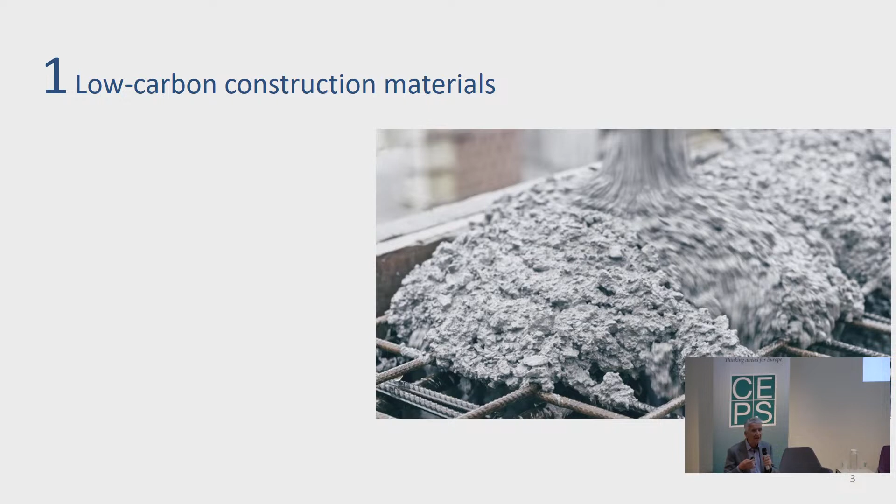Just in a nutshell, how did we start and how are we proceeding? Of course, we started out with issues related to low carbon construction materials, and this is still something we are very much interested in. I want to mention that Austria is really leading already in low carbon cement, at least compared with all the other member states in the European Union. But pretty soon, what's going on?

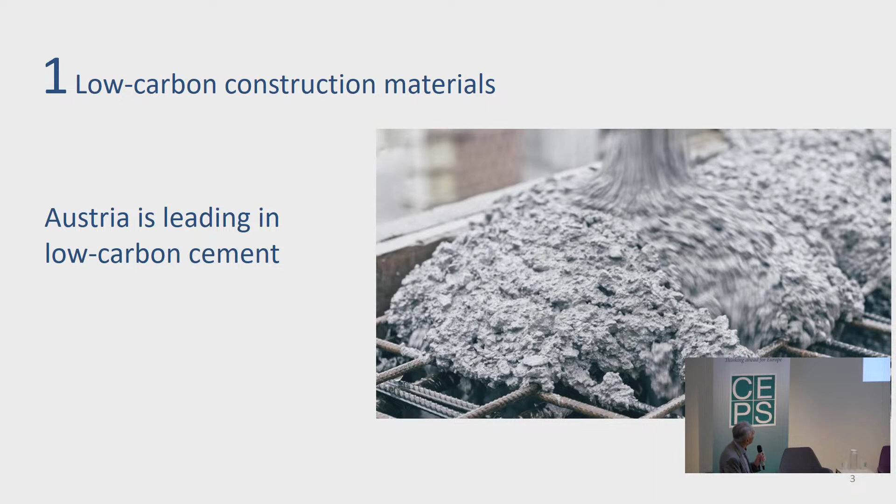Pretty soon we realized that we need to look at the full value chain in the use of building materials, and we definitely switched to what we call a systemic approach to the use of materials in general and construction materials in particular. To give an example, this is the design of a staircase, which was very much inspired by the structure of a spine. We'll definitely hear more about these design principles in a few minutes.

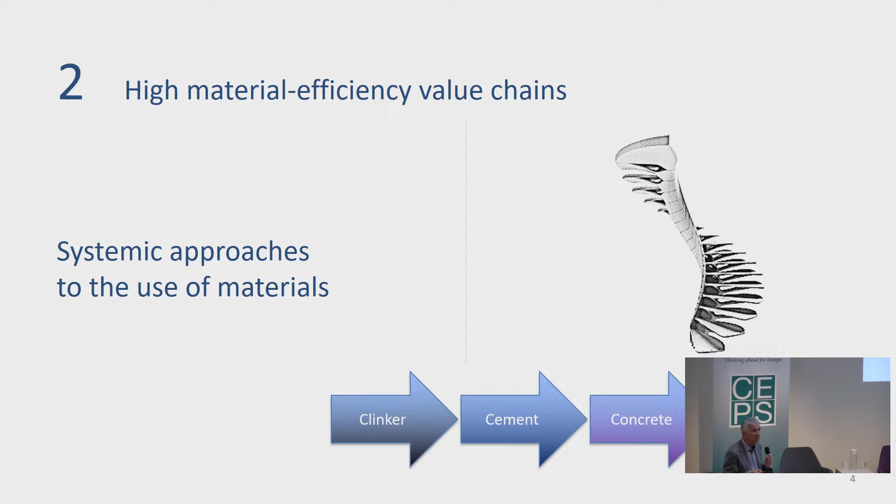Something is, wait a minute.

Okay, and I think the third step was that we discovered that buildings can have a very active functionality, as we want to call it, in localized energy systems. This is also something which will be presented in more detail later, where we discover that buildings have an outstanding capability of serving and providing thermal services.

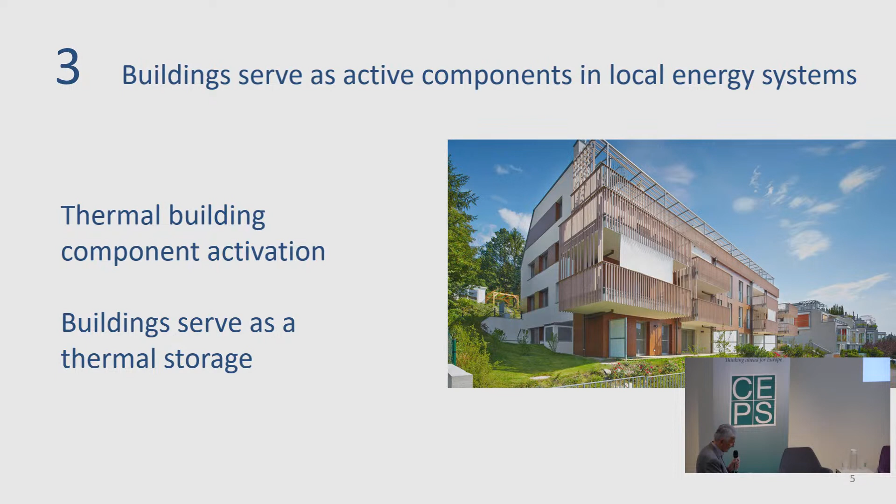And the next step was that we discovered that we really should look at what we call ensembles of buildings, not just single buildings, but how buildings interact and could interact. And we really learned a lot about this in Switzerland.

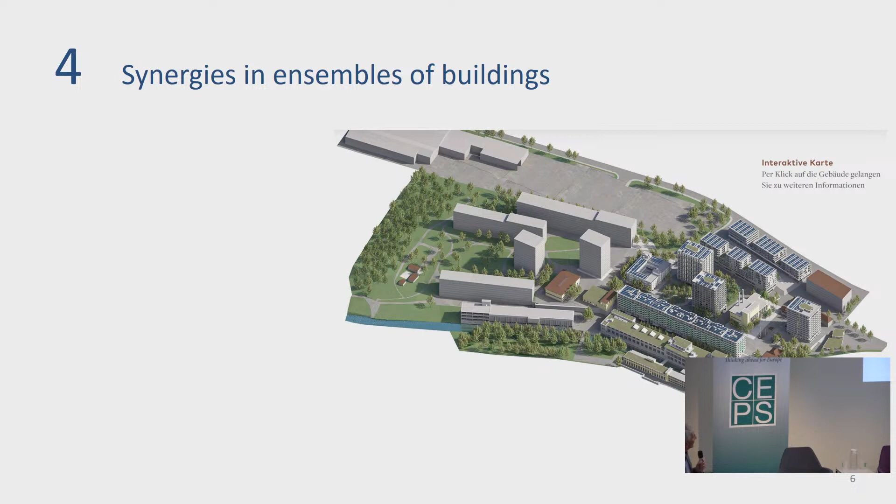In Switzerland, there are now some outstanding new developments called Quartiere - urban development projects. For example, this one is the so-called Papieri Quartier. This was a paper factory which was operated for more than 300 years.

And this is being converted now into a very innovative urban development project. Related to this innovative architecture, what we call integrated functionalities for living, working, and other activities, these projects are outstanding in their energy concepts.

And the keyword is so-called energy hubs, because they demonstrate that on a very localized scope, you can provide all thermal energy services for heating and cooling locally. This is done mainly by the so-called anergy grid. Anergy grids are also something which needs much more attention - these are low temperature thermal grids connected to local geothermal components.

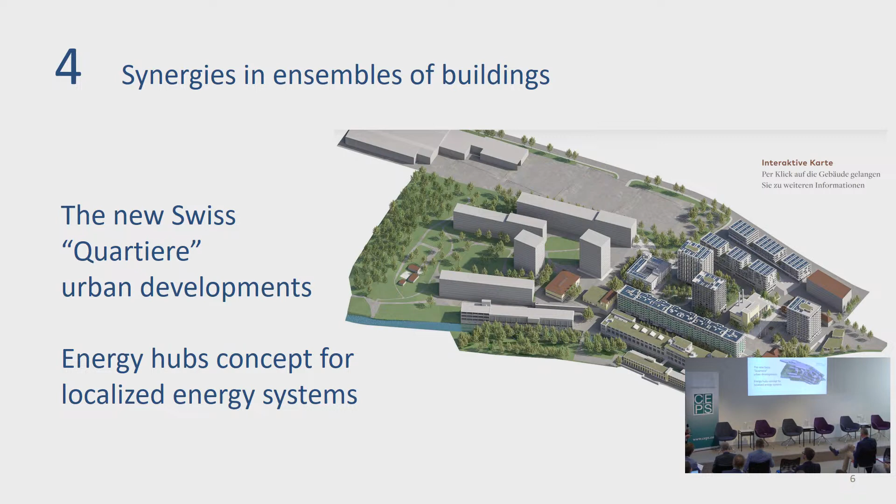And I would say this is now our latest achievement, because we have discovered that the construction industry could become a focal point for what we call circular carbon management. I think the Reconstruct community has at least some responsibility for coining this term, so circular carbon management is something we are really very much proud of.

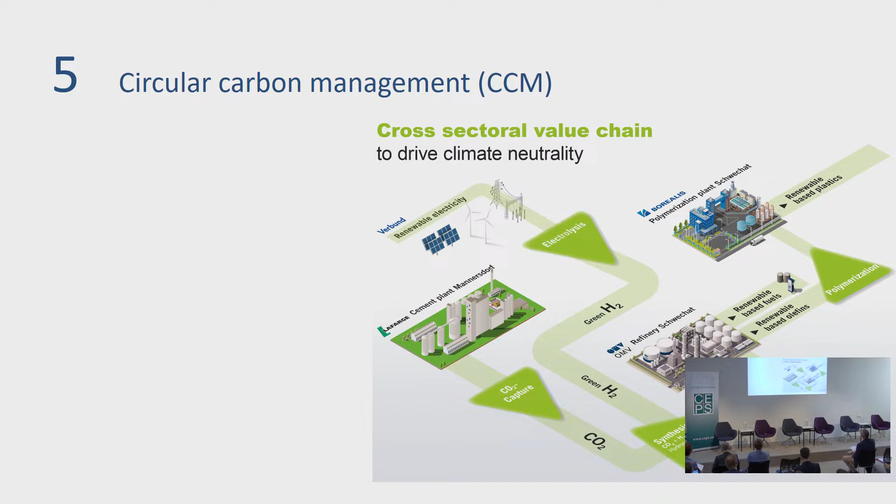And this is what we like to call the Austrian flagship project for this concept. Basically, this describes how CO2 emissions from a big Austrian cement factory, about 700,000 tons per year, could be captured, combined with hydrogen, which is also produced locally.

And the CO2 plus the hydrogen could be converted into what we call synfuels and olefins, synthetic olefins. The synthetic olefins would end up producing very advanced polymers. And at the end of the lifetime of the polymers, they could be returned or recycled to the cement company, and this would close the carbon cycle.

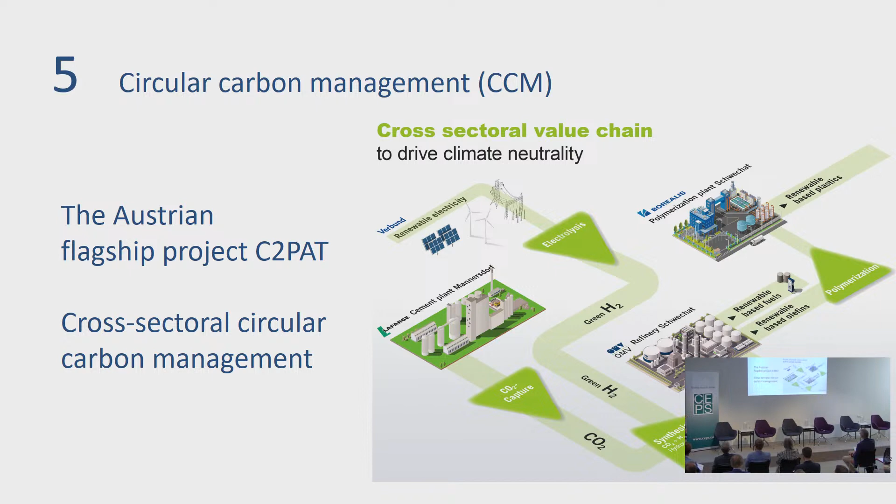And I really could tell a lot about this project, because it has so many outstanding features, and it's getting really international attention. But this is my story, and I'm really looking forward to our joint discussions.

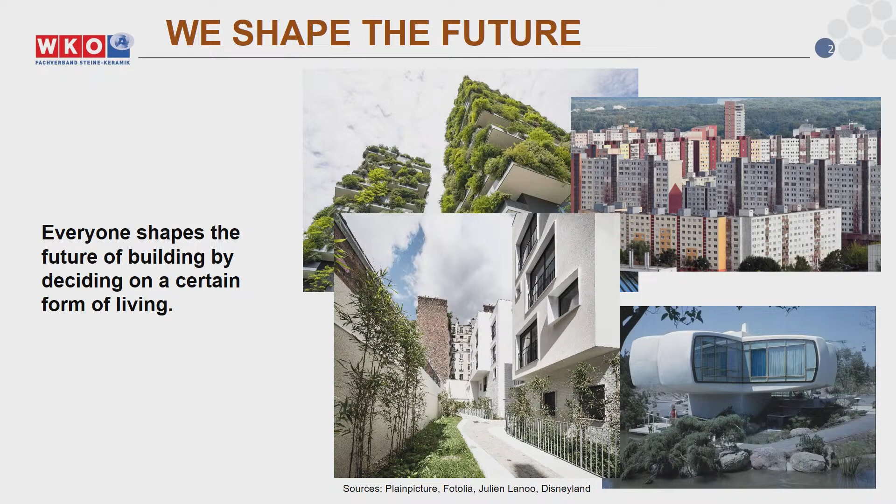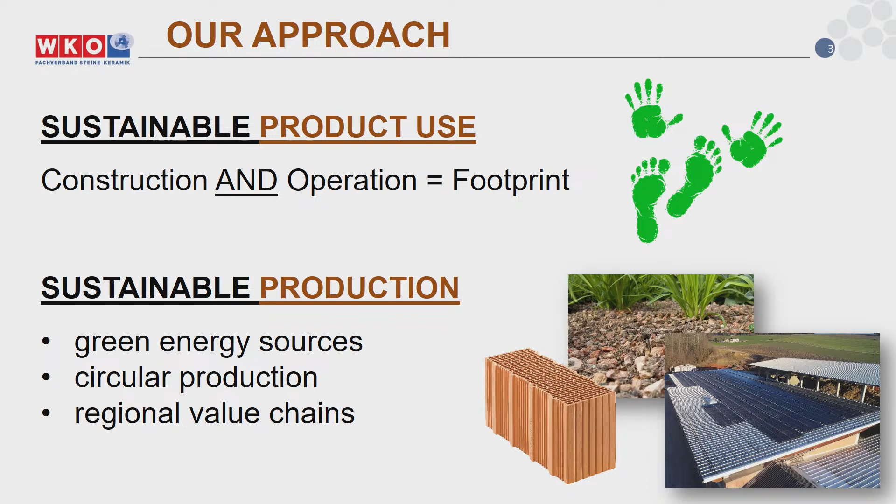And we have two different approaches. We are focusing on sustainable product use - not only the construction of the building, but also the operation of the building - and of course sustainable production itself, where we can take action in our own company. And I think this is a basic need that all companies in the European Union have to tackle.

For the first thing, sustainable product use, we developed together with scientific assistance a model, the so-called Brick Bauhaus 2050, that describes a building standard, how we want to describe a building with a carbon footprint as high to reach the 1.5-degree goal based on the European Green Deal.

On the slide you can see the Brick Bauhaus Sun, where the 9 qualities we described are shown, where we want to show what's the impact, which qualities have impact on a footprint of a building.

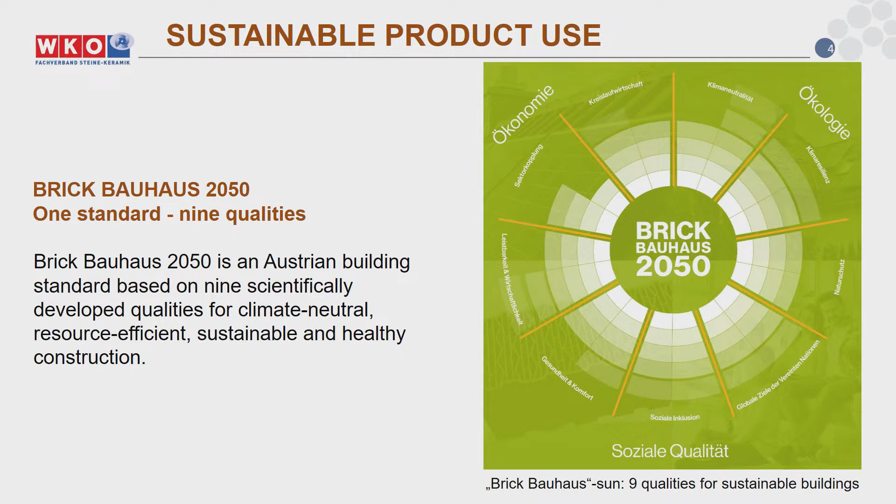I want to pick out a few. We have 3 main perspectives. First of all, the ecology. Of course, the first point, climate neutrality, is very important, but not only the most important one.

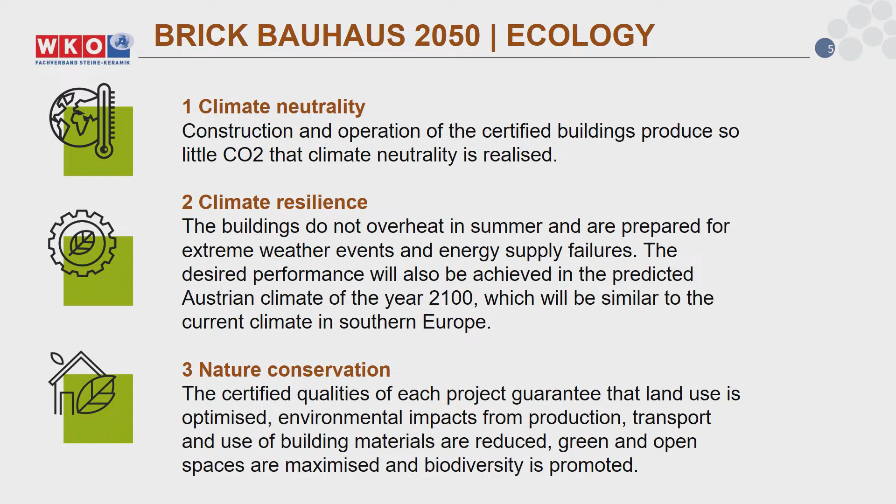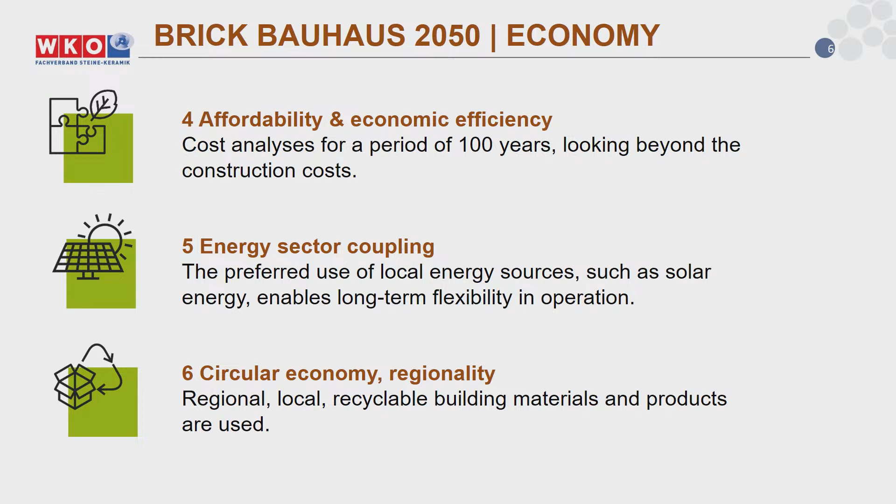Second is the economic perspective of a building. A building should be affordable too. It's not only that it's climate neutral, but also affordable, for example, and therefore circular economy and regionality are very important too. And third, the social quality is very important too.

It's not only economy and ecology, it's also the social quality. You can focus on the UN SDGs or the comfort that a building offers. It's a mixture of all these 9 qualities in order to reach a sustainable building.

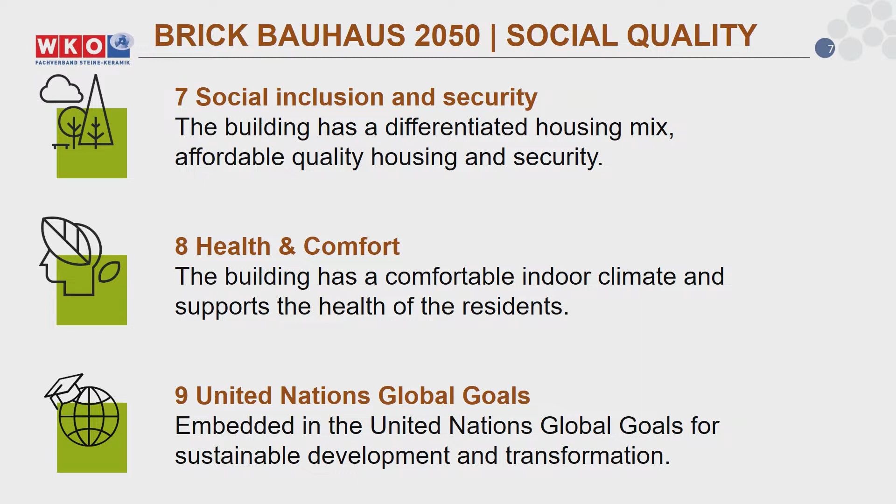A goal without a plan is just a wish, and therefore we set a target based on scientific knowledge in order to reach the 1.5-degree goal. It's described as 11 kilograms of CO2 per gross floor area and year for one building, and it's separated into construction and operation.

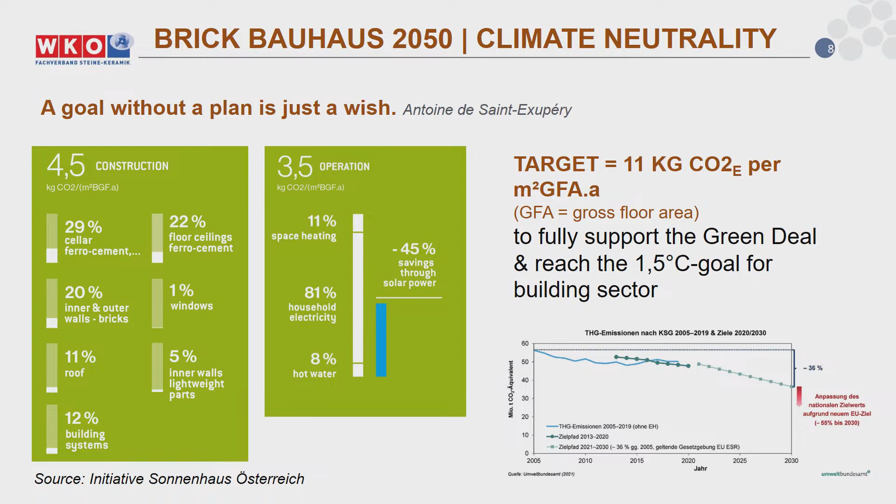You can see this is an example of a real building in Austria. It's not only construction, it's operating, and the possibility for savings, for reducing the footprint. We have different possibilities to reduce the footprint, and we have used them to reduce the carbon footprint of a building.

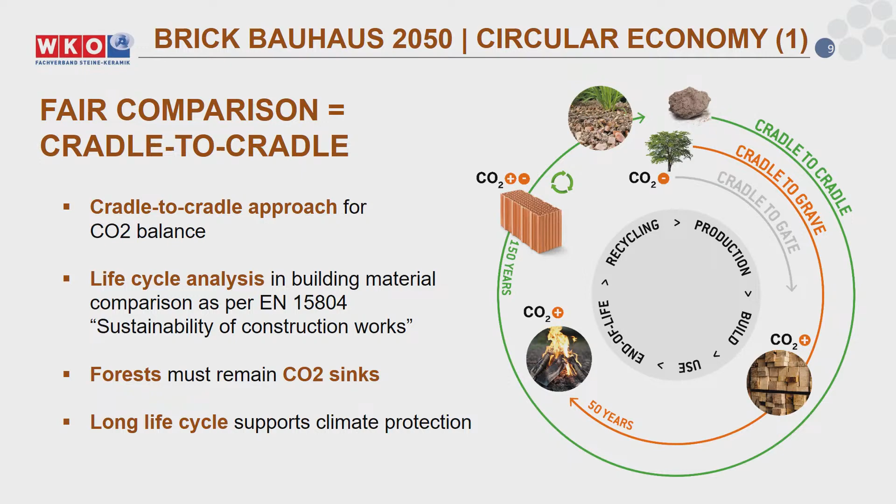As I told, I want to pick out a few things that we as an SME can tackle on ourselves. For example, the circular economy, cradle-to-cradle approach. We think it's the only way to make a fair comparison, balancing CO2 emissions for a product and the life cycle, the durance of a product — for example, a brick, 150 years and more — has to be taken into account in order to make a fair comparison.

Circular economy, we live circularity. Mineral construction materials are infinitely recyclable. We have to shift, you can say that mineral resources are used and not consumed, because they have a second, a third, a fourth life and so on. Maybe as a different product, maybe as the same product. We have different possibilities and we have to use them.

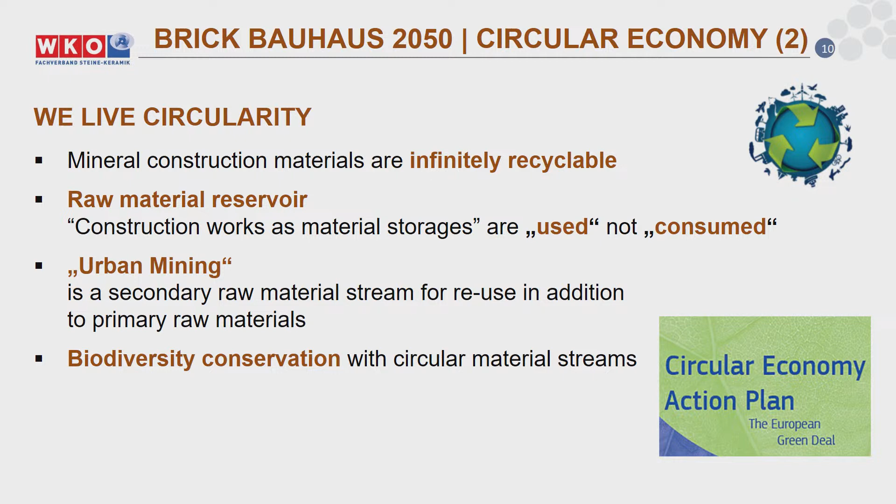Urban mining is very important. We have to see which possibilities there are, and also we have to take into consideration biodiversity, which is a basic need and a good possibility for our industry where we can make an impact.

Regionality, I said too. We are known for regionality. Our products stay within a very short distance from our factories. This is also a thing we can have influence on. You can see the figures: we are not talking about thousands of kilometers, we are talking about less than 100 kilometers where our raw materials come from and where the products go to. I think this is a very important thing to talk about.

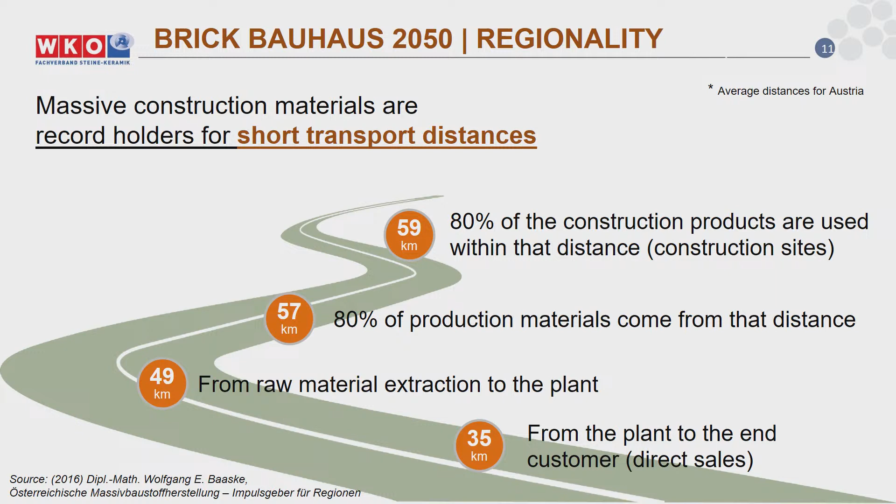Then a step on to green production. Of course, it's not only the product use. Here we have different possibilities to reduce our own carbon footprint when producing our bricks. Here you can see, for example, in the middle is a photo from our factory. We are investing in new technology in order to reduce our footprint.

There are different other possibilities and ways to do so: green hydrogen, shifting to electricity-driven kilns. We have different possibilities, but as an SME, we need support from government, from the public side, in order to tackle these challenges.

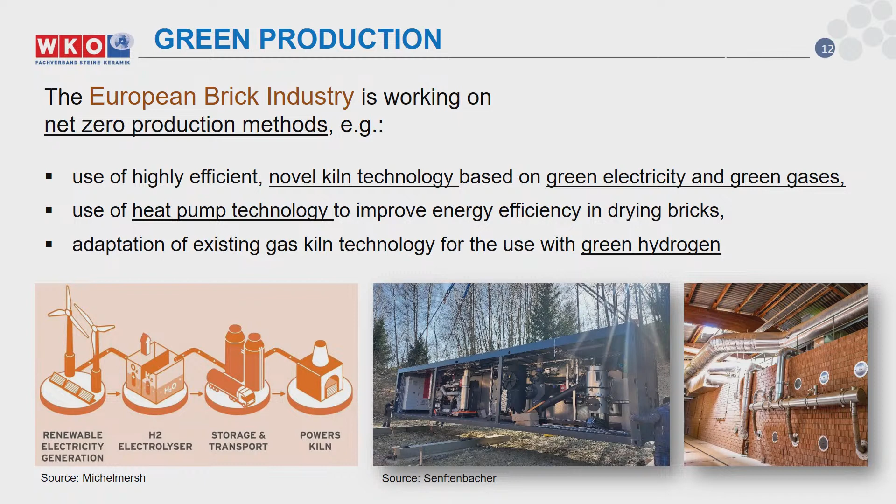Our needs, yes, we have to invest a lot of money in order to tackle this challenge. We have already accepted the challenge, that's absolutely clear. And I want to live myself in a good future and in a low emission future.

And therefore we need a good supply of green energy. But we, as an SME, can't become full energy suppliers. That's not possible. We're investing in PV, but we can't produce our own energy for the whole company. Therefore, we need public support.

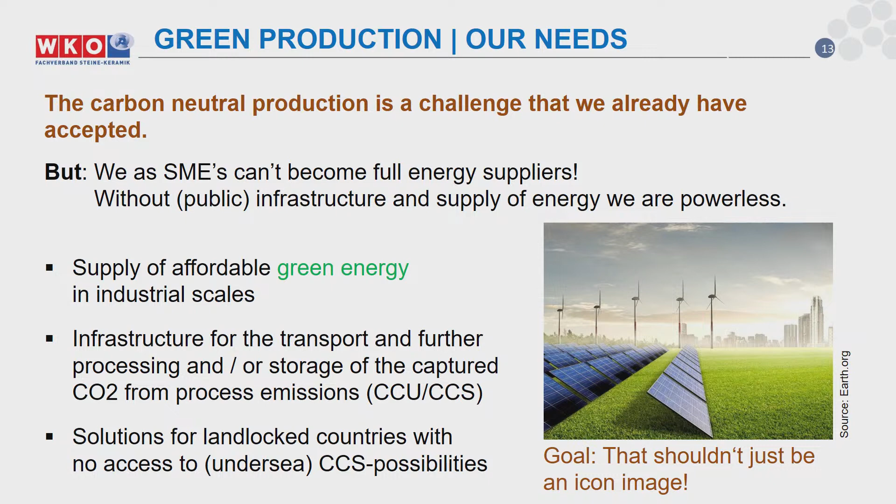Also, in order to tackle the process emissions, there is a topic too, CCU, CCS. We have to tackle this topic too in order to reduce our process emissions.

Yes, we are happy that the European Union has seen these challenges and is working on them with different programs. For SMEs, I don't want to talk on every topic here, but simplification of procedures is very important for us. We don't have the staff to invest a lot of time and money in the procedures themselves, but we need simplification, then we are ready to do so.

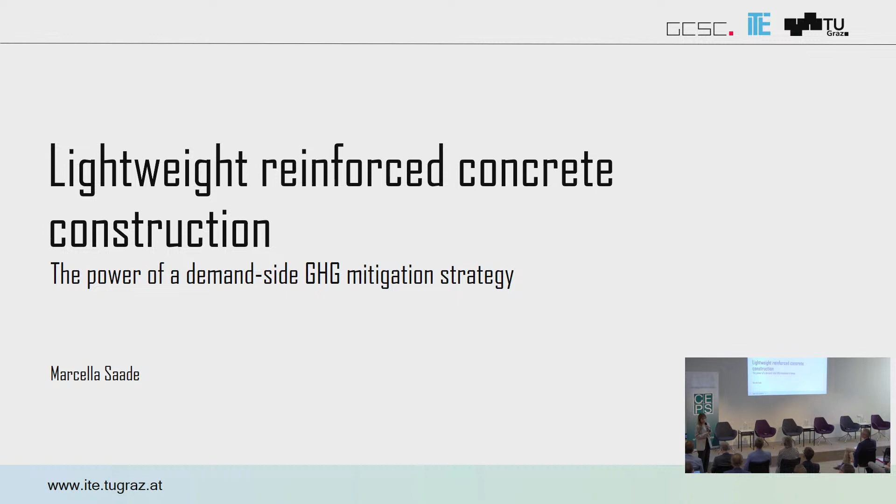Thank you. Good afternoon, everyone. What I intend to quickly show you today, I'll try to keep it under 7 minutes, is the material and GHG savings potential of a demand-side mitigation strategy, using lightweight concrete structure as an example. But what do I mean by demand-side GHG mitigation strategy?

The IPCC publishes these scenarios we all know about temperature increase and mitigation pathways for limiting global warming. These scenarios are based on integrated assessment models, and these models rely heavily on supply-side mitigation strategies. Demand-side options, mostly related to a decrease in consumption in general, are often excluded from these models. But we know that ambitious demand-side mitigation strategies have the potential to really reduce the need for negative emission technologies, which are typically associated with higher risk and higher cost.

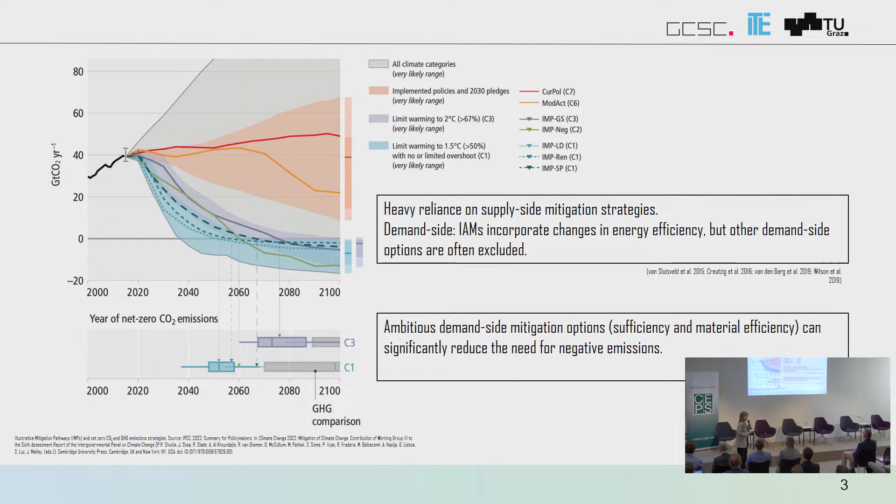The choices we make today in terms of materials and amounts of materials we use are something we won't be able to change later on. So we believe that reducing material demand is the natural and effective first step, analogous to what we did to reduce operational GHG emissions. We first reduced the energy demand of buildings.

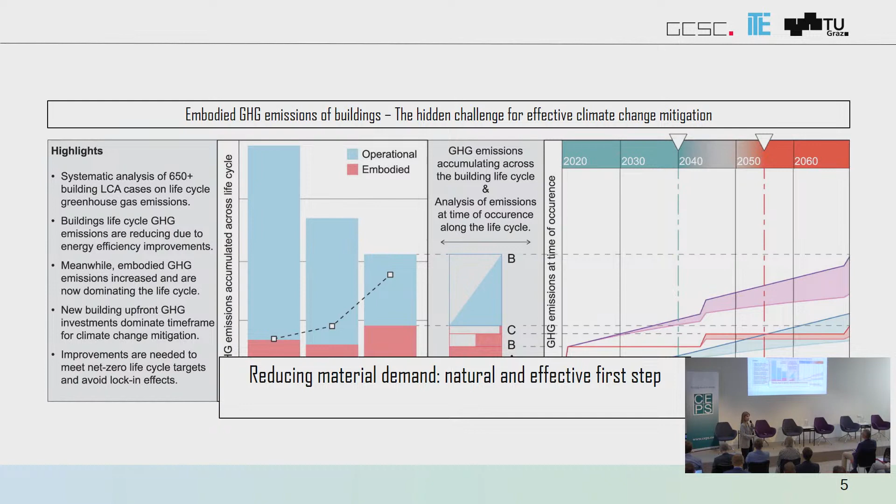Let me quickly show you how to do so with concrete structures, lightweight concrete structures. This project, called Coebro, from the institute where I work, the Institute of Structural Design at TU Graz, is based on an idea inspired by the past, when material costs were really high, that we could have light, slimmer concrete structures with far less material performing in the same way. We do so through additive fabrication, or 3D printing, in this project.

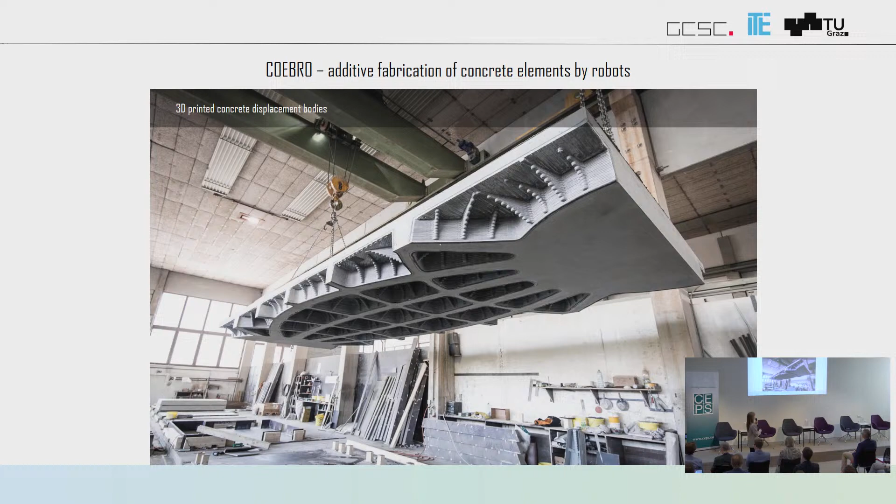There are careful structural calculations done to ensure we can find the geometry that keeps the structural stability of the structure while allowing for significant weight reduction through what we call displacement bodies. This leads to the voids you see in the picture. So we have to do very careful structural calculations and determine the best possible geometry that will allow for maximum weight reduction.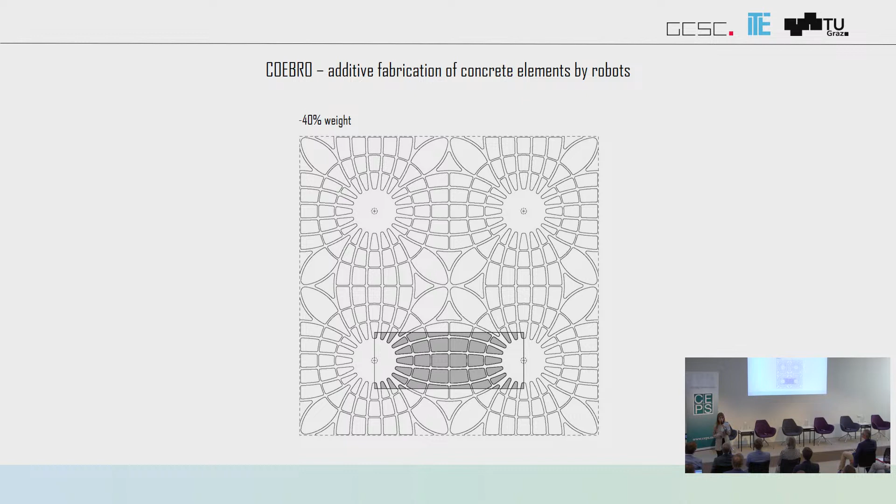In this project, this is a prototype. This figure you see here is a prototype of a flat slab for a roof, and there was a 40% reduction in concrete weight in this slab. They actually constructed a section of the slab, highlighted here, to perform all the testing to make sure the structural stability was there.

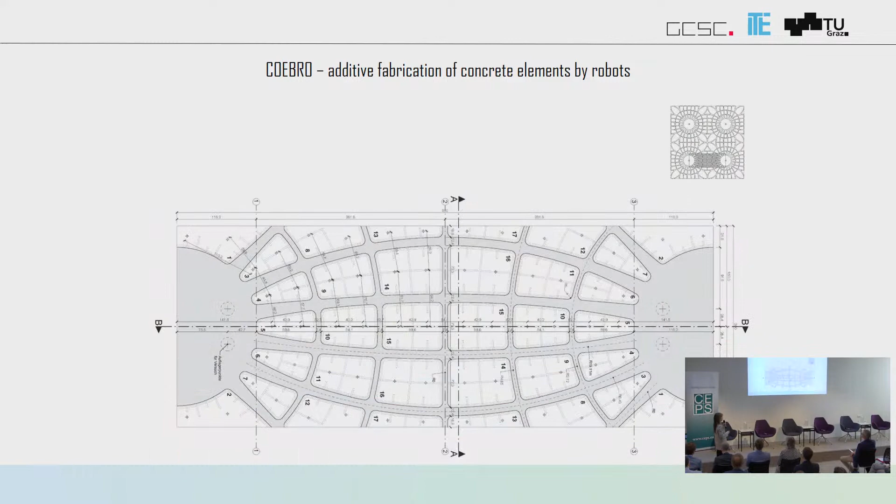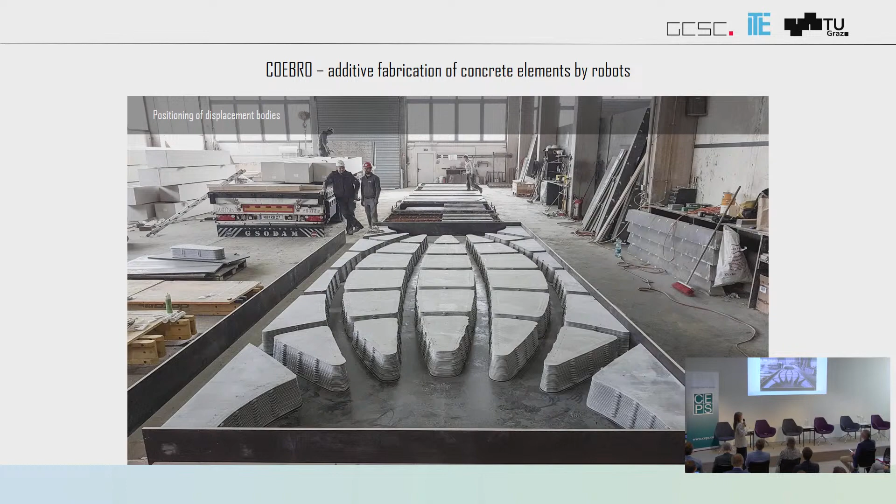Let me show you the step-by-step of this. We define the optimal shape of these displacement bodies. Then it's printed with a robot that is now at TU Graz, at the Laboratory of Structural Engineering. Once printed, they were brought to one of the research partners' facilities and positioned according to the plans and the geometry that was set. Once carefully positioned, reinforcement is put in, and then concrete is conventionally poured.

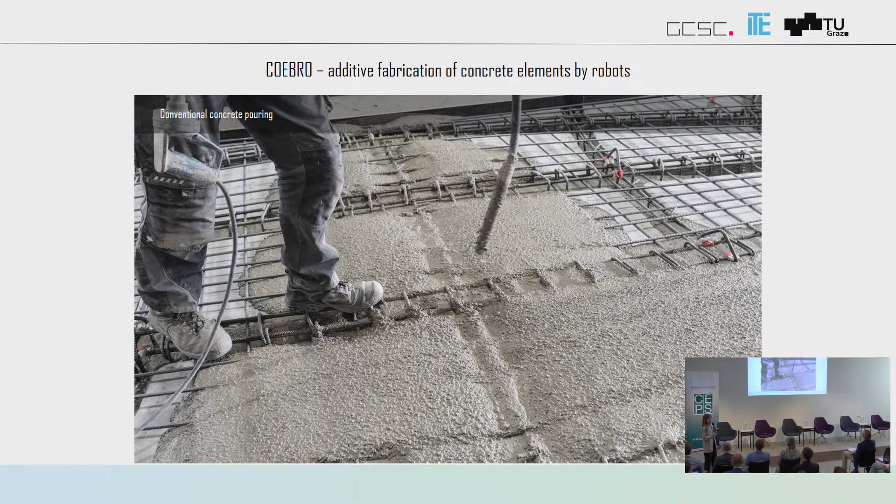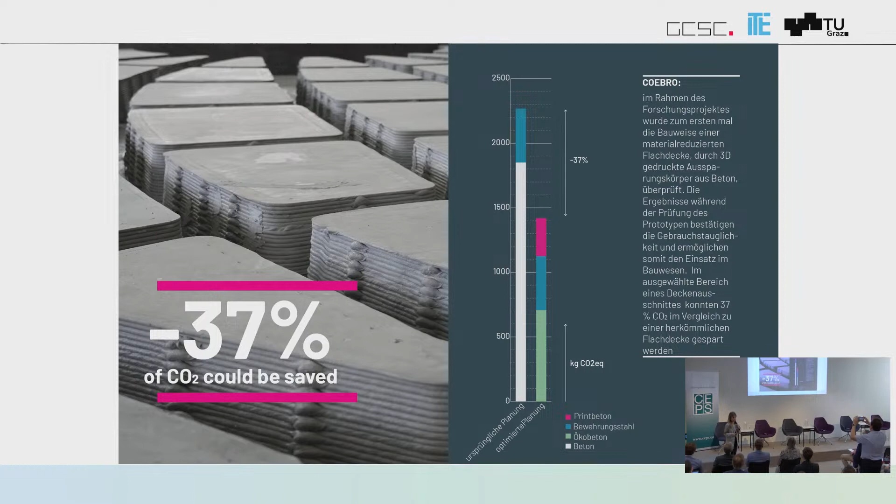So where do I want to get with this? The preliminary life cycle assessments made on that section of the flat slab I just showed you indicated, apart from meeting all the structural requirements, a reduction of a quarter, 25%, of GHG emissions. But if we had also changed the mix of the concrete poured, we could get up to almost 40% GHG emission reduction compared to the original design. After this prototypical testing, the team was also able to test this concept in real-world cases.

This is a project in Nördlingen in Germany, actually a very recent winner of the prize on concrete architecture. The team was commissioned along with some research partners to build this ceiling for an underground parking lot. So a very similar process to what I've just shown you happened.

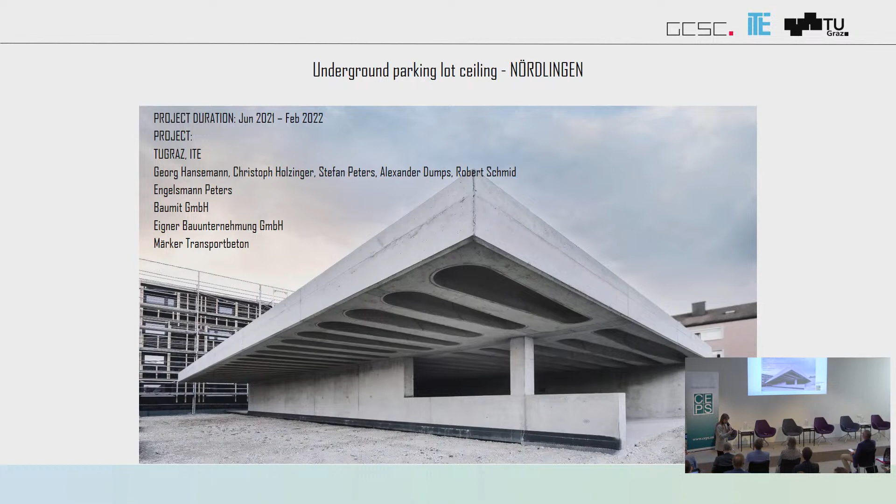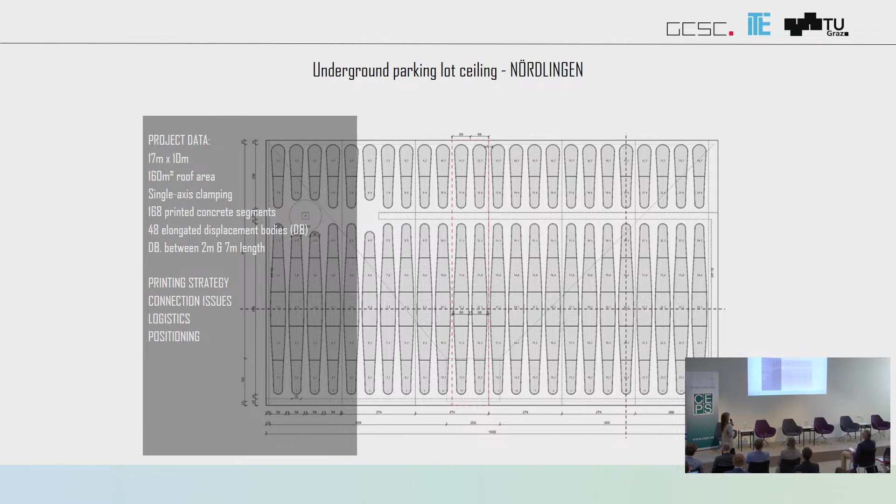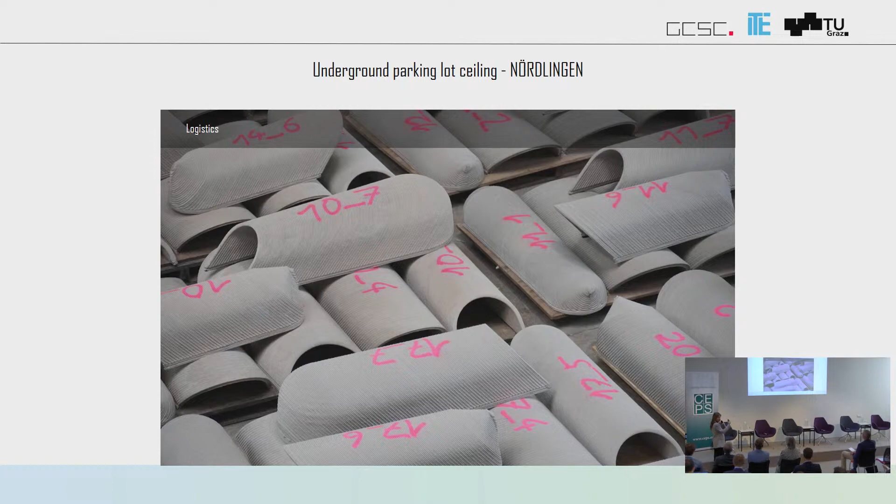First, there were the calculations to determine the optimum geometry and shape of these displacement bodies, as we call them. Once they were printed, we had to define the best printing strategy to ensure stability. Then there was the definition of the most efficient way to transport them to site, because they have to be safely transported, which is an added challenge of this strategy. Then they're positioned according to the geometry that was set before. Steel reinforcement is put in place and concrete is poured, typically, as before.

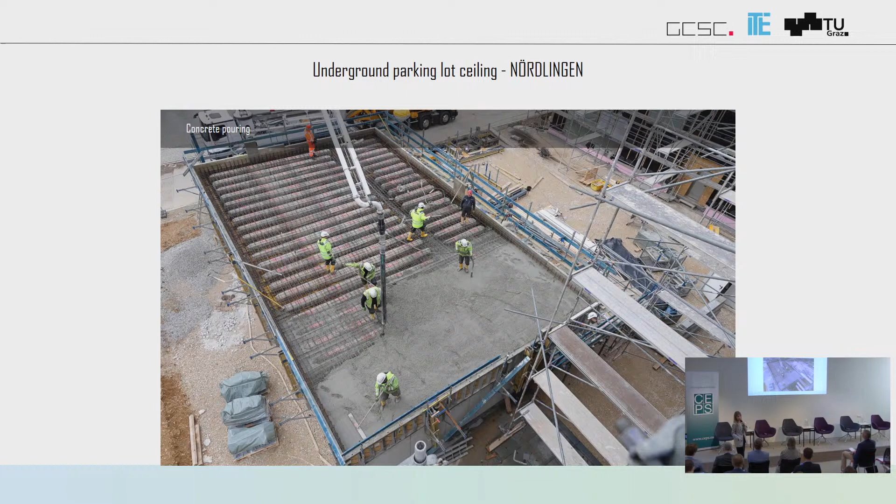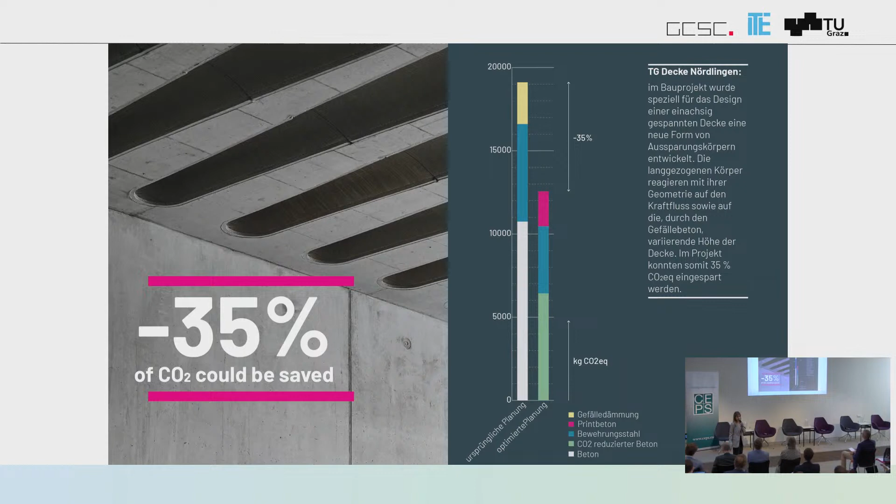In this case, there was a reduction of 35% of the GHG emissions in comparison to the original design, using a concrete mix that was optimized in terms of CO2 emissions.

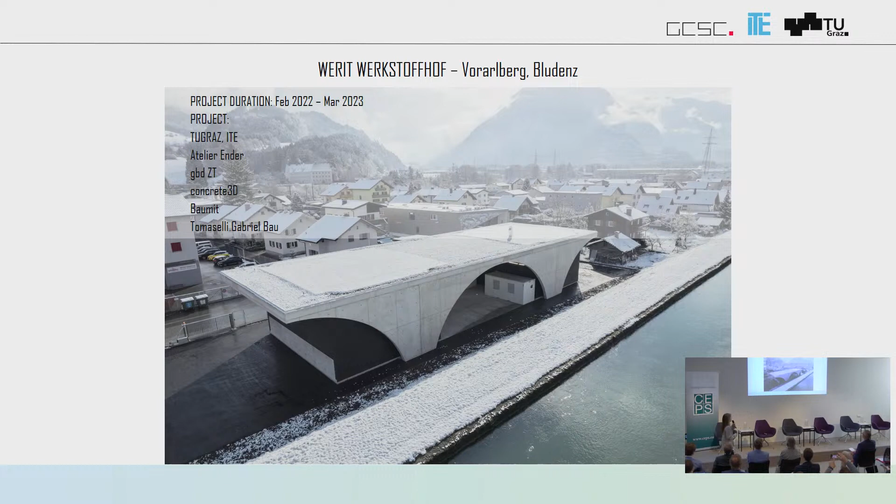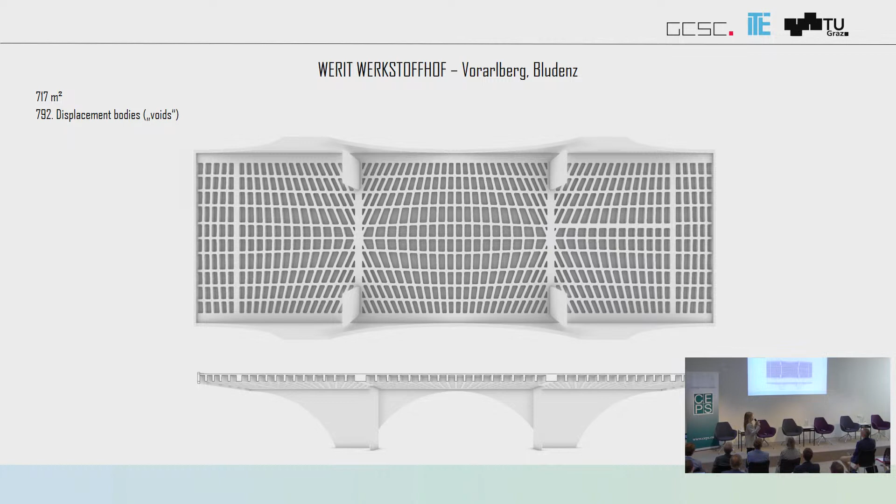Now, the last example I'll show you is this one. It's the largest of its kind constructed today, in Vorarlberg, Austria. This is actually a flat roof with over 700 square meters of area, where 792 of these boxes, or displacement bodies, were printed. It led to a very significant reduction, as in the first case.

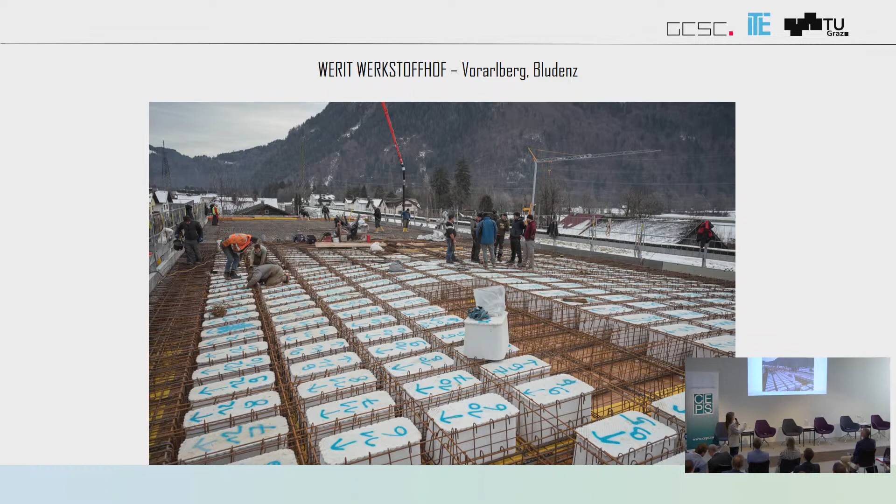Of course, there were a bit more challenges because of the sheer amount of displacement bodies that had to be transported. But it was all done successfully, and it was built recently, in March this year, as you can see in this picture. Very similar to the first prototype I showed you, here we got a 24% reduction in impact, but using an optimized CO2 mix, one can get up to 40% reduction in GHG emissions.

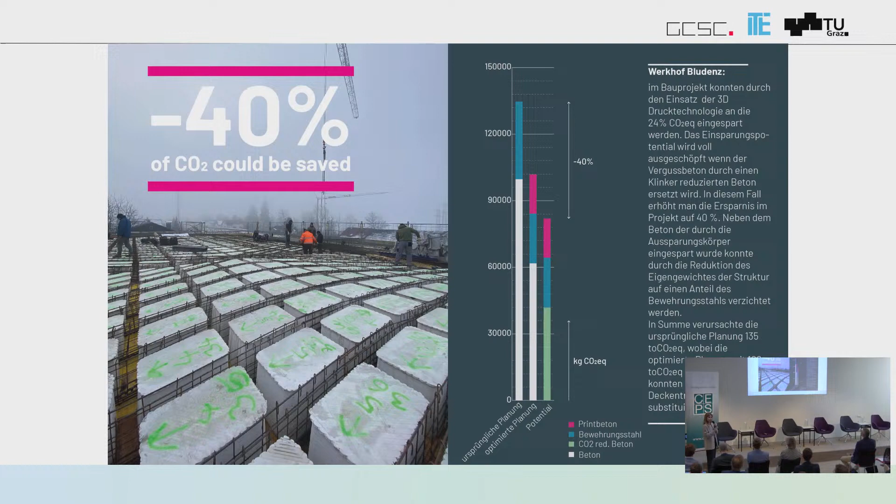But what now? How do we implement this at a wide scale, ensuring maximum GHG emission reduction without environmental trade-offs, due to the additional activities needed for this concept? Our next research goal is to design careful prospective life cycle assessments where we can explore different material compositions, different printing strategies, adaptation of construction sites, and try to predict the evolution of this technology as it reaches higher readiness levels. That is done through careful scenario modeling.

So there's a more robust statistical assessment in this LCA to make sure we can predict it. The idea is to identify the pathways that would point us to the best outcome, both in terms of reduction of GHG emissions and cost, with minimum trade-off, to explore the maximum potential of this demand-side GHG mitigation strategy.

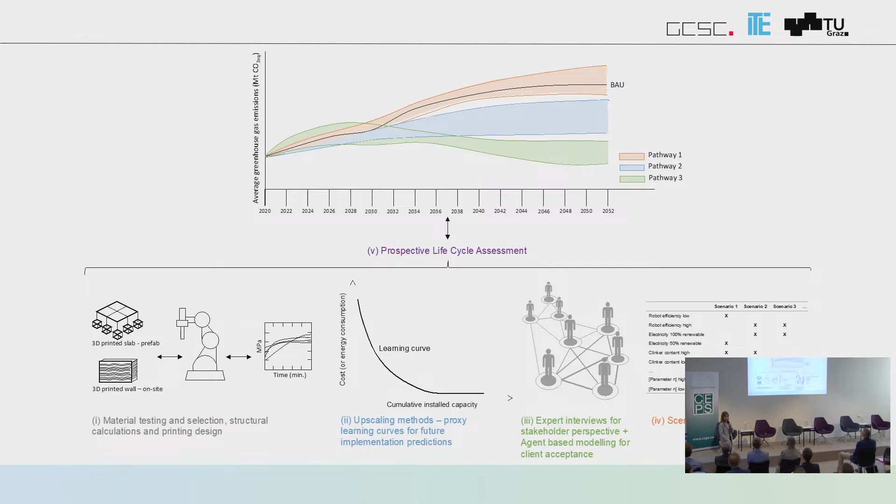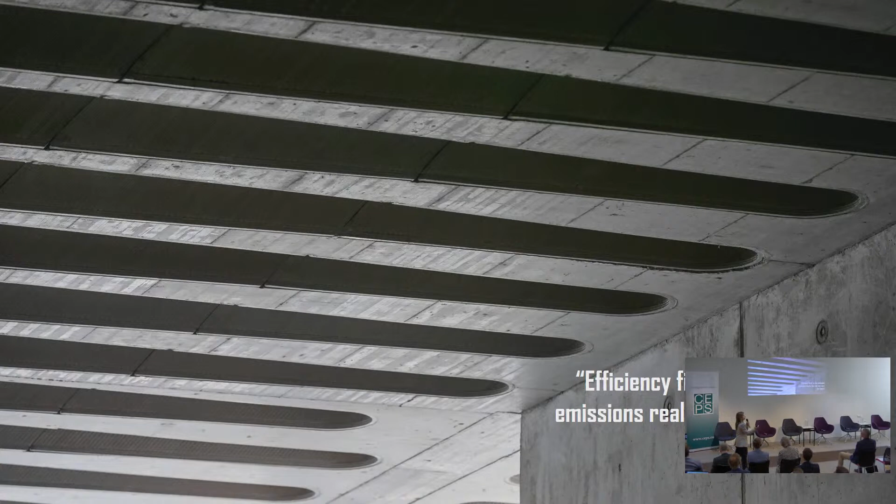But to sum up, my message is we strongly believe that this efficiency-first paradigm, so successfully applied to reduce operational GHG emissions, should be replicated in the embodied emissions realm, because it is typically a lower cost option with lower risk of environmental trade-offs, and it leads to the reduction in environmental impact we so desperately need. Thank you.

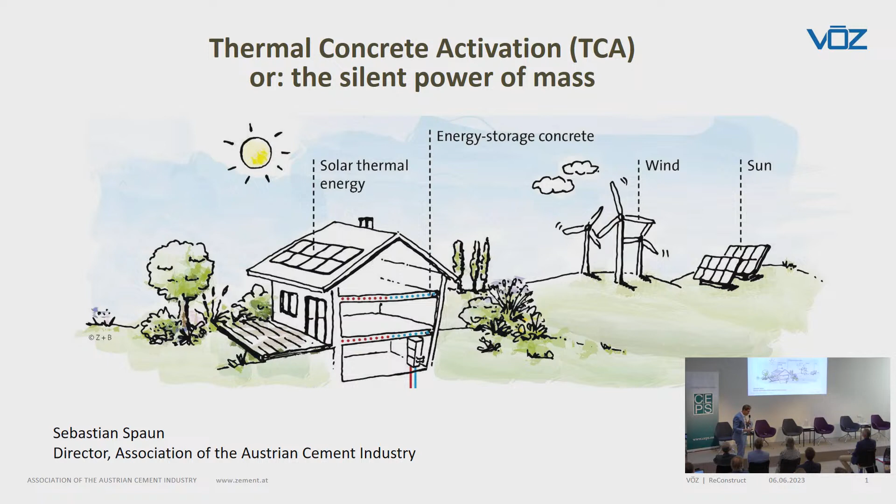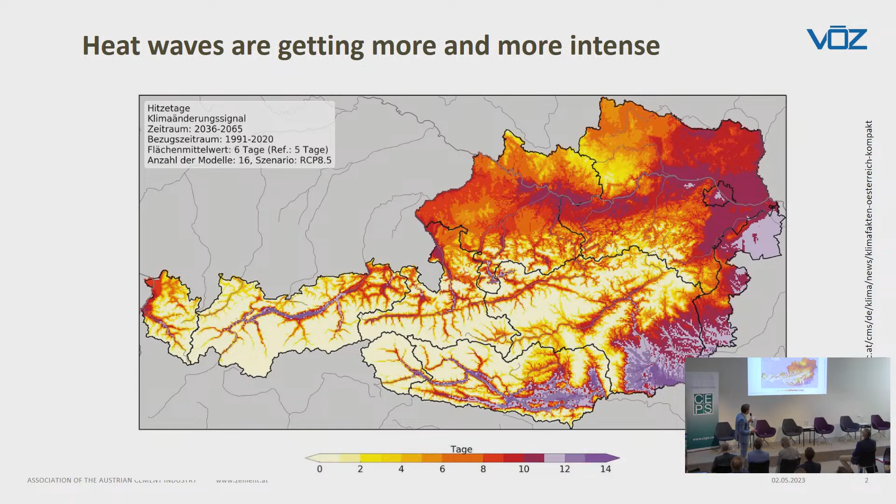The silent power of mass in a building is the topic of my presentation. Heat waves are getting more frequent, and heat waves are getting more intense. This is a picture of Austria in the second half of this century. If we react in that way to the heating up of our cities, it would be completely the wrong way.

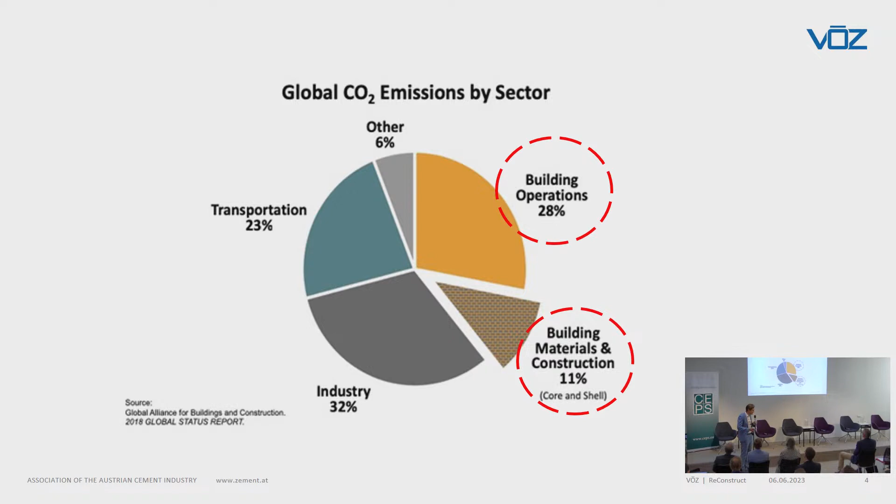This is my first aspect. Second, heating and cooling of buildings is responsible for close to 30% of global CO2 emissions. Another 11% are the materials Marcella was speaking about. And then, of course, a big part of transport can also be allocated to what we all do here. So building is in the center of our decarbonization strategy. We definitely have to act.

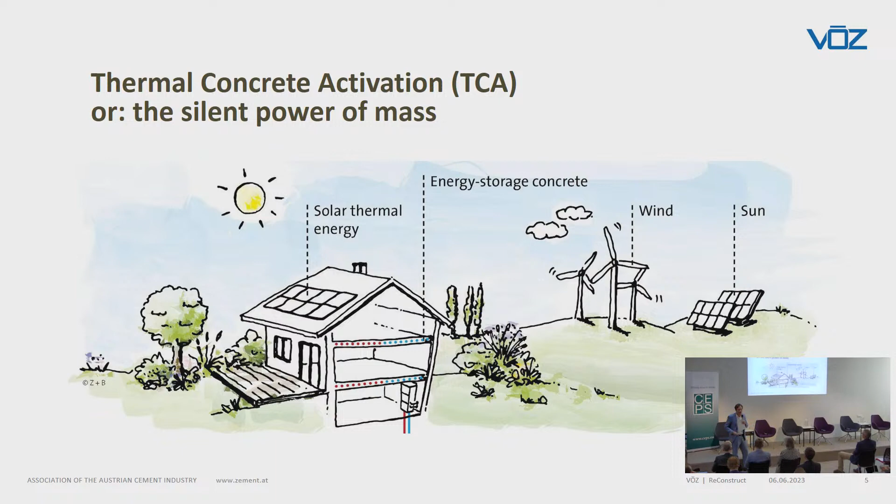So what can concrete core activation do? What we need to do is heat and cool our houses with renewable energy. Of course, first we have to insulate the houses and bring efficiency first, bringing down the demand. But renewable energy is fluctuating—sun and wind fluctuate—and therefore we need storage facilities. What I want to discuss is how we can use the concrete that is anywhere in the housing, the ceilings especially, how can we use the ceilings to store the energy of wind and sun.

The first project I want to talk about looks very simple, but it was a milestone project. With this house, we tried to heat it via a heat pump, and the electricity for the heat pump was coming from a wind park 100 kilometers away. Our goal was to show that when we store energy via the heat pump while the wind is in the grid, we can store it in the ceiling, and when the wind is gone, the heat comes out of the ceiling by itself.

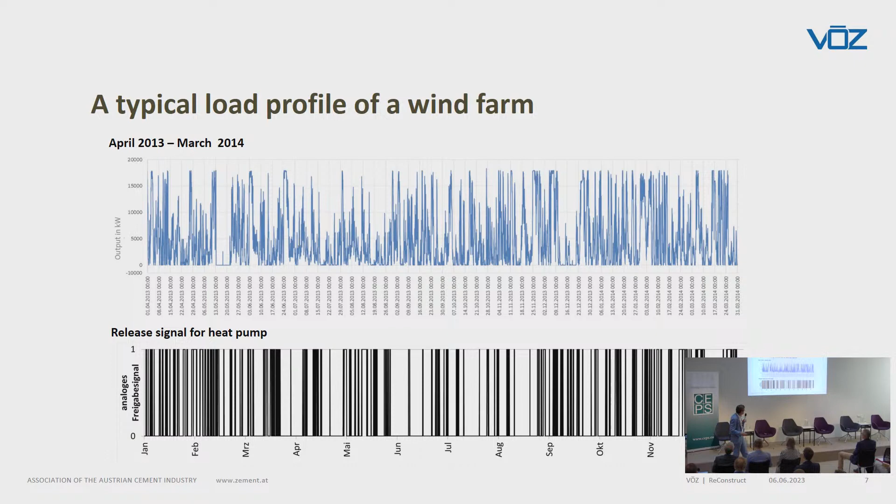Here you see a typical wind profile of a wind park in Austria. The west wind, same as in Belgium, goes through Europe and comes one day, stays one day, goes one day, and then probably we have 2 or 3 days break without wind, probably without sun. So what we can show with this simple house was...

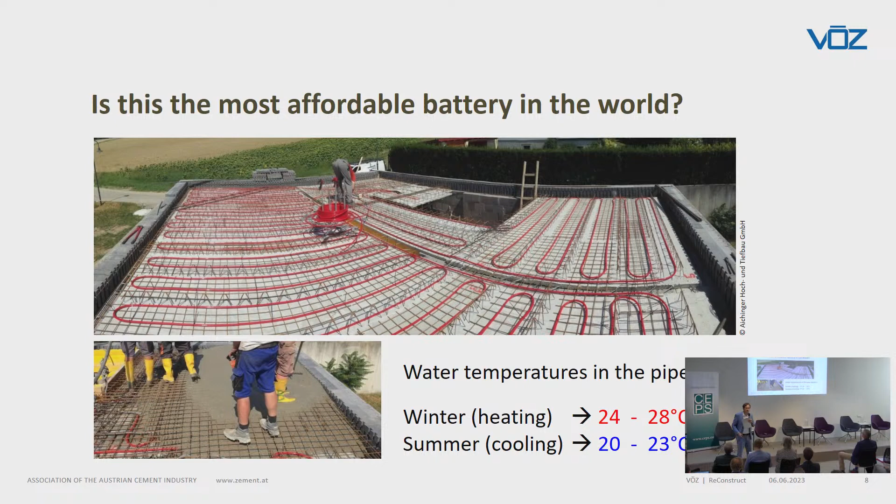Here's the technology. It's the most primitive technology you can use. Instead of putting the pipes in the floor, we put the pipes in the ceiling, because the ceiling is like 20 centimeters, or we could use a Marcella's ceiling, it would work too. The only thing you need is 5 meters of plastic pipe per square meter. It costs you about €4 per square meter.

In the second year of monitoring, we could show that we could heat this house close to Vienna with 90% surplus energy from a wind park. Not only wind, but wind that was somehow too much in the grid, making us a demand side problem. So this convinced us, and we went on.

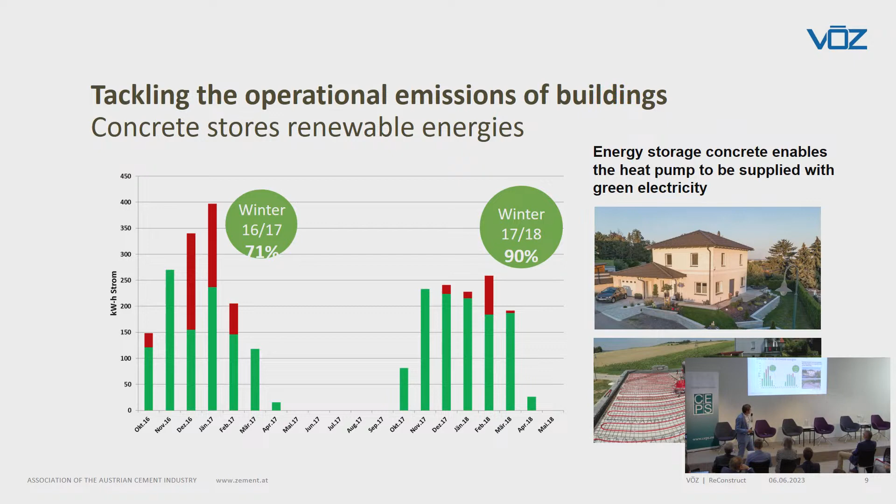This was a very famous project. It was the first time with 160 flats, two thirds for social housing. What we wanted to show is that the people living in these flats for hopefully the next 100 years will have cool summers without using fossil energy.

What is the technique behind this? Once again, we have this building component, activated ceilings. We are using a standard heat pump, smaller than normal, and we have geothermal drillings. So 3 flats use 1 drilling.

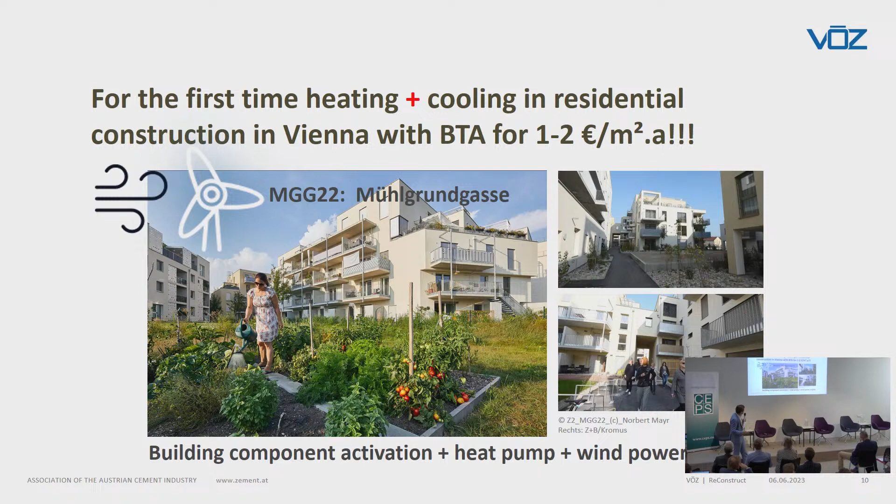This is summer in one of these flats. We rented one to show how it reacts to a heat wave, a typical heat wave running through Europe, through Vienna. What you see is we simply pump water from the ground, from the deep drilling, through the concrete ceiling, starting in the middle of May and ending somewhere in September. We could keep the temperature in this social housing project in the city of Vienna seriously below 25 degrees.

There was no second when one of these flats had more than 25 degrees, mostly between 23 and 24 degrees. What are the costs? The energy needed to pump the water through the ceiling and down into the deep drilling is 25 watts per flat. I have an internet device, a WLAN modem, in this flat. It uses 50 watts. So for 25 watts, we are cooling these flats.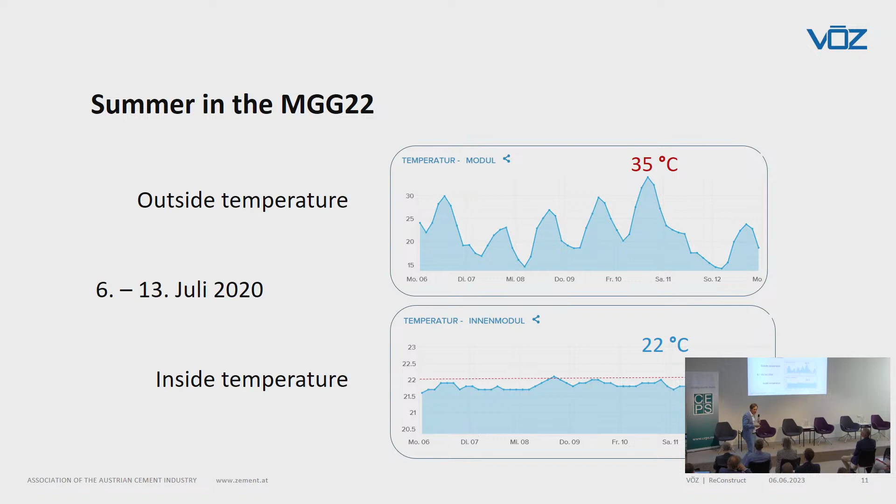The second good thing is that we are regenerating the ground under the deep drilling, so we can start with a higher soil temperature when the next winter season comes for heating. So it's even an advantage for heating the house in the next season.

Another example, and I'm very proud of this: an education campus in Vienna, Aspern, 20,000 square meters. Do you remember your school building? I think you do. Did it look that way? Mine didn't.

This is a school building with 48 classrooms, 20,000 square meters, and once again deep drillings, heat pump, concrete core activation. And it is used all year round.

More than 95% of the energy to heat and cool this building is coming on site, via the deep drillings and photovoltaic solar panels on the roof. So 95% of the energy is collected under the base plate and on the roof.

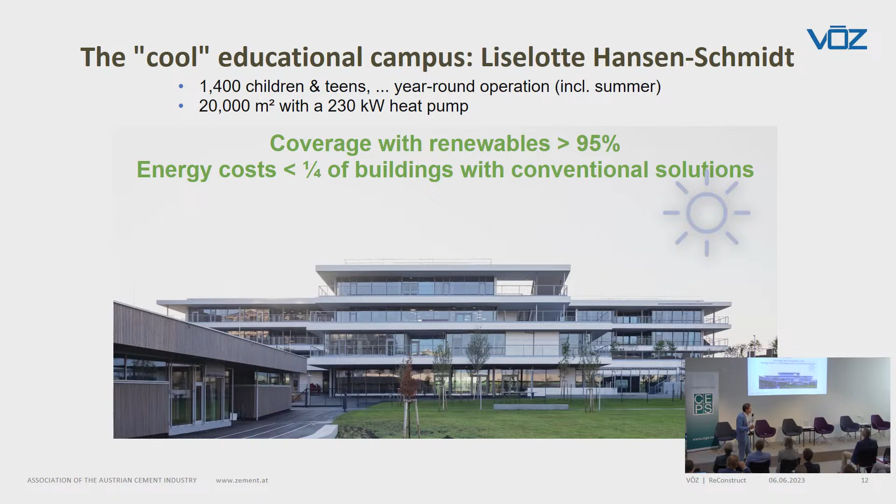Once again, this cool building is also used in summer. If you go there in summer, when it's 35 degrees outside, you go in and it's like an oasis, very comfortable.

What we do there in a very simple way, in my eyes, has potential to be spread over the world. You all know that last year Austria was growing by 70,000 people, partly due to the Ukrainian war. And in the years before, Vienna grew by 250,000 people.

So Austria is one of these areas that is growing. But not only Austria is growing, the world is growing. And we know we are getting 2 billion new people on the world in the next years, I would say.

And they are not living in such beautiful buildings I just showed you. They are not living in the surrounding. They are mostly living in buildings like that. Here is mankind is living in buildings like that. How shall we decarbonize these buildings?

I'm pretty convinced that with storage capacity and with the potential to generate energy in the desert, outside, offshore, or wherever, on roof. But to be honest, if you have 35 floors, you can only decarbonize the first 3 ones with the photovoltaic on the roof. The other 30 has then to come from somewhere.

So I'm convinced that this technology of using houses as energy hubs can really make the way around the world. In Vienna, in the last 3 years, we made somewhere around, it's an estimate of 1 million square meters. That's probably 10 to 15 percent of the housing area in Vienna. And in the moment, it's going up.

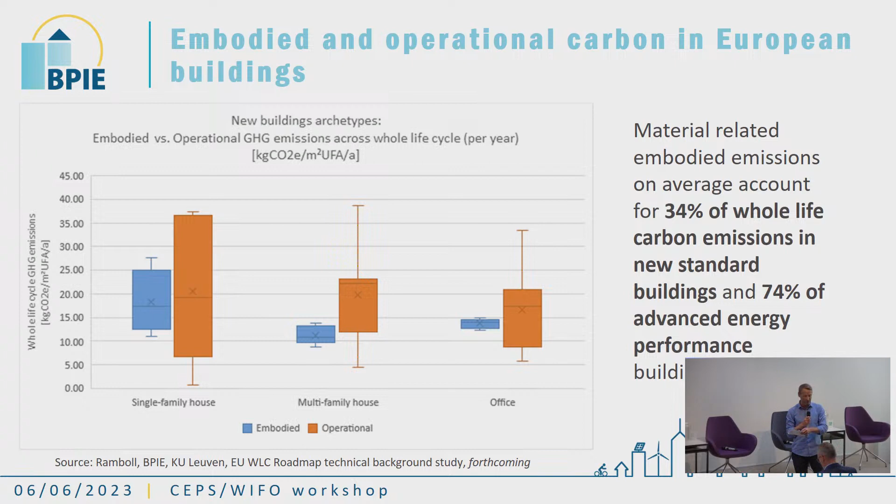It makes a very effective climate mitigation action. So this was the individual building level, but once we scale up, we change our perspective completely and look at what happens at the European building stock.

This was part of the work we are currently doing for the European Commission together with KU Leuven and Ramboll, to understand what happens if we keep current practices and the existing policy landscape in place. There is an increasing gap in terms of carbon savings, and we are not getting close to what we need for a climate neutral building stock. Some emission savings are from energy efficiency renovations, so these are operational carbon savings. But in the lack of legislation targeting embodied carbon or life cycle carbon at the building level, we are not doing much to remove the embodied carbon parts of the building stock.

One of the reasons we don't have a policy framework for addressing embodied carbon in buildings is because we lack the evidence base. Currently we don't have a robust evidence base of exactly what is happening, where the carbon hotspots are, or the magnitude of emissions embodied in materials. So this work is groundbreaking, in the sense that it provides sufficient reassurance for policymakers to move forward with legislation on embodied carbon.

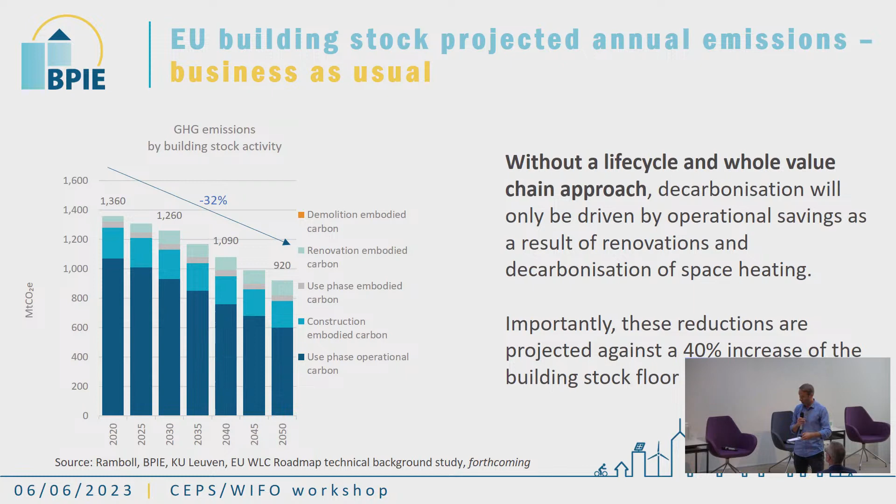So these are the carbon hotspots when we looked at building materials. I have to make clear from the beginning that the intention here is not to pick certain materials as being good or bad. I think the point is that they are all needed together, and they need to collectively be part of a cumulative policy strategy to drive down the carbon performance of the building stock.

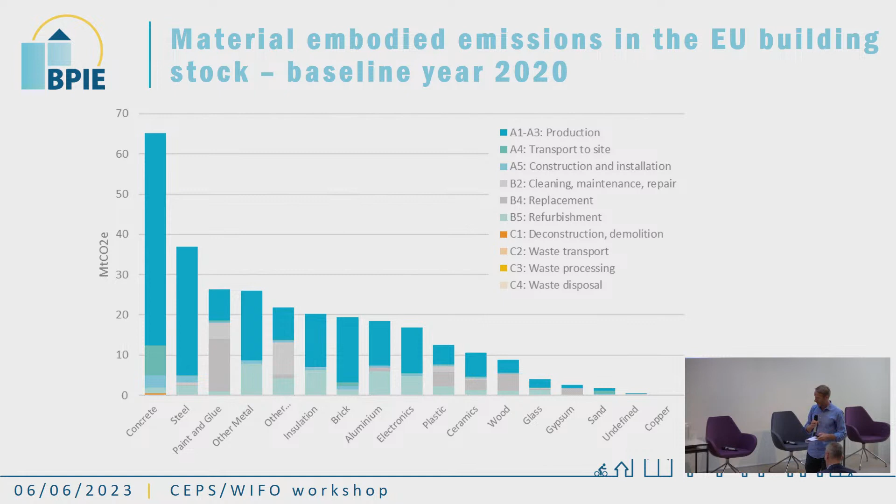Certain material categories were known carbon hotspots for the building sector. Others were a bit more surprising, like paint and glue. This is to a certain extent because embodied carbon comes specifically from construction as well as renovation activities, which are a very little part of the actual building stock. We have a very low construction rate, something like 1.4%, and an even lower renovation rate of 1%. That's 2.4 to 2.5% of the building stock responsible for this spike of emissions. The rest of the buildings are just going through maintenance, use, and operation. So other material categories like paints and glue were a bit of a surprise in that they should also be part of this carbon reduction strategy.

But solutions exist to drive down carbon. We looked at, and I come back to Marcela's reference to the IPCC report, which categorized carbon reduction solutions into avoid, shift, and improve categories. This is the taxonomy, the classification, that we also analyzed and modeled in this study.

Very importantly, these are not just the improve and shift measures, but also about preventing and reducing the need to have new constructions or more construction materials than is needed to fulfill a specific purpose or use. So these materials do exist.

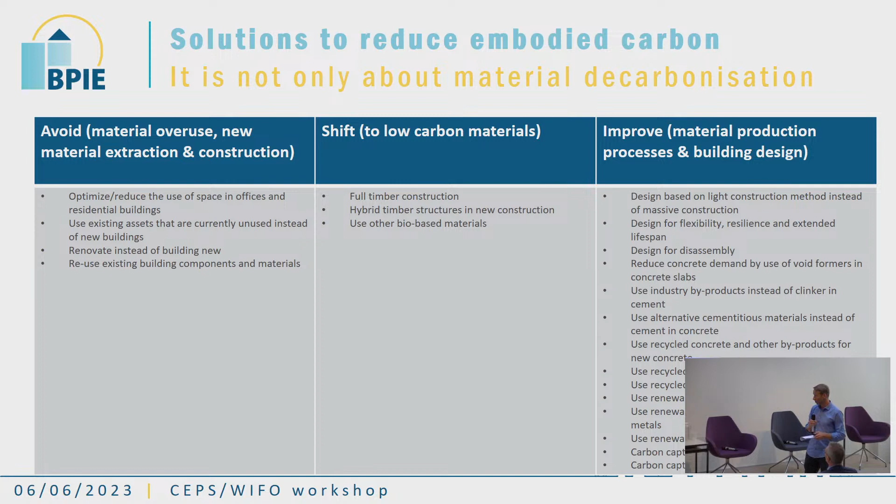Importantly, we also applied a very comprehensive set of criteria to assess their potential to drive down carbon, because it's not just about material decarbonization. It's also about driving down demand, making sure you're using the right sort of materials in the right places. What is the availability of locally sourced materials? What materials are relevant to certain construction types and building types and so on? So the picture is a bit more complex.

But if we apply this, the key message is that we can bring down whole life carbon emissions from buildings. Together with these technological solutions, but also with demand measures, the sufficiency measures, we can drive them down by something like 75%.

And this is with today's available technologies. We haven't included technological breakthroughs that may come, or renovation-related embodied carbon reduction solutions, where we simply don't have yet enough research or enough data. Most of the embodied carbon research has been in new constructions, but with renovations, and we know we have a huge renovation challenge ahead of us, we simply haven't even touched this topic.

So finally, the key takeaways. It is possible to reduce life cycle emissions, and this is with solutions that are available today. But this will require a very comprehensive and almost transformative approach to how we build, how we renovate, and how we currently use our buildings.

There is also a very important sequence of how we are going to approach this, and I come back to the previous slide. This is an important message for policymakers as well: most of the carbon savings are in operational performance, which means the current focus of legislation on energy efficiency renovation is correct. We have to continue pursuing this. Then the next step is to drive down upfront emissions, so embodied carbon from new construction.

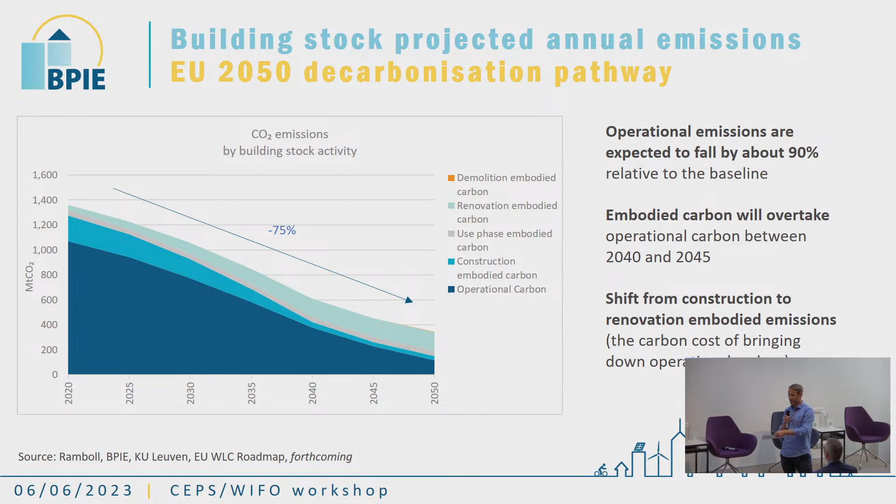So the proposal of the European Commission, in the Energy Performance of Buildings Directive, to focus on disclosures for new constructions, disclosures of whole life carbon, is very important, because that's indeed, in the next 10 or 20 years, the most relevant embodied carbon hotspot. But after this, it's very important also to focus on renovations and to optimize renovations for whole life carbon performance.

And then finally, I think we can do this simply because, looking just for inspiration, we have been using low carbon materials something like 50 or 60 years ago. So it is possible.

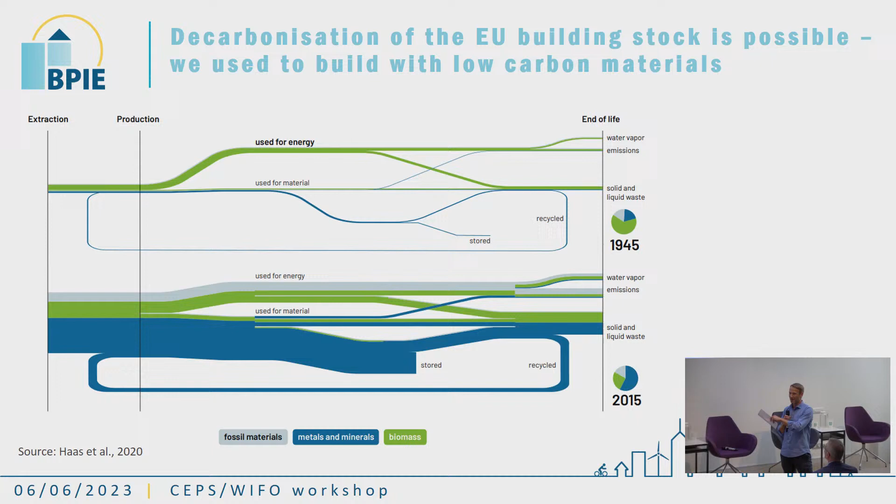Thank you. Here we came to the end of our case studies presentation. Katharina Knappen-Wirlich from DG Grow is now going to tell us what she makes out of this and how she wants to take this further. Lots of good opportunities.

I guess there are a few trade-offs somewhere along the way, which you from the European Commission, DG Grow, and others will have to deal with. So please, if you give your comments, that will kick off the panel discussion, and then I would invite all the other panelists to join us. So Katharina, please.

Well, thank you very much. I will probably have to disappoint you if you expect detailed comments on the presentations that have been made. Some of you know that I joined construction policy about half a year ago. What seemed at the beginning to be a lifetime now seems like a second. So I'm still learning a lot, which means you cannot expect loads of learned comments on what you do. But what you could expect is that I listened carefully to everything you say. You can also expect that most of my colleagues know much more about it and would have been less enthusiastic and wowed than I have been the last three quarters of an hour.